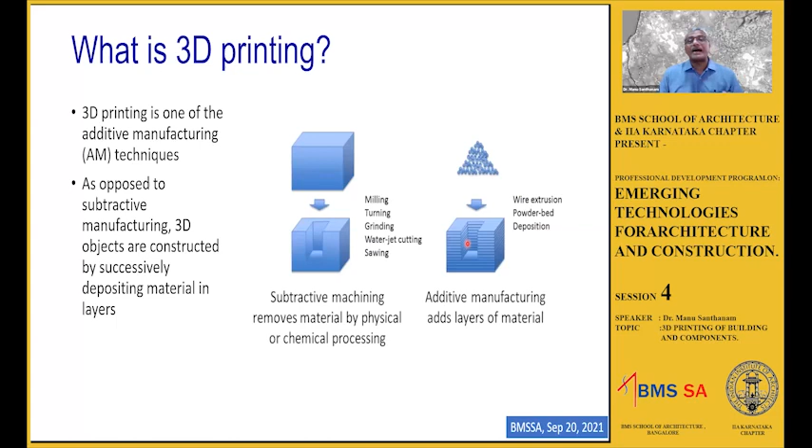Now, in construction, additive manufacturing can be of different types. 3D printing in construction can be accomplished in two ways. One is extrusion-based 3D printing, where the idea is basically extruding the material out of a nozzle - almost like pushing something through a die that comes out with a desired shape - and then printing layer upon layer to build up the structure. That's called extrusion-based 3D printing.

The other option is binder jetting. Here, you have a bed of powder and you spray ink on the bed only in the locations where you want the ink to solidify the powder. For instance, you may have a bed of sand and spray some type of polymer on top of it in a certain pattern. The polymer interacts with the sand and encapsulates it, causing it to harden only in specific locations. This is done over a number of layers so you can build up the entire structure. That's called additive manufacturing by binder jetting.

But for the most part, construction 3D printing seems to follow the approach of extrusion-based printing, because that's where the maximum size and scale can be realized. So you see here a typical frame-based printer - that's the frame, and the gantry on top of it can move along this frame, and there's a vertical component that can move along the gantry.

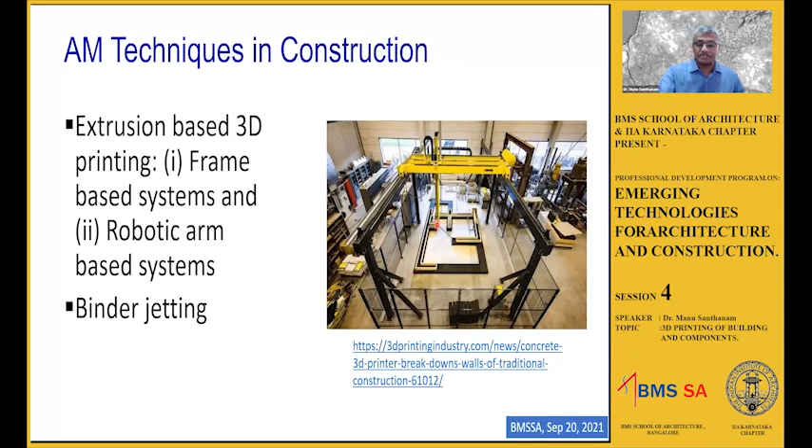Now, why is it useful in construction? We know very well that a lot of time in construction, I'm sorry, I don't know why this is going on its own. So a lot of time in construction is spent in actually,

Okay, there's some setting I need to change, just 1 minute. Just give me a minute, I'll just change this and come back. Just give me a second. For some reason, the slide is changing automatically. Sure, sir, no problem. Okay, let me try again. Hopefully it won't change on its own.

So I was talking about the fact that construction 3D printing can be advantageous in a way that we can save on the cost of formwork. And not just the cost of formwork, you can also save on the time. A substantial amount of time in construction is related to setting up the formwork and then disassembling it after the construction is done. So if you can work in a system without any formwork, you can save considerable amounts of time in the construction project.

And of course, the formwork material itself is expensive, and you may have to spend a lot of money trying to create formwork for shapes that are otherwise not really possible. For instance, if you have a lot of curves in your building, such things with formwork can be quite difficult to execute. In such cases, the geometric flexibility that you get from 3D printing can really be a major

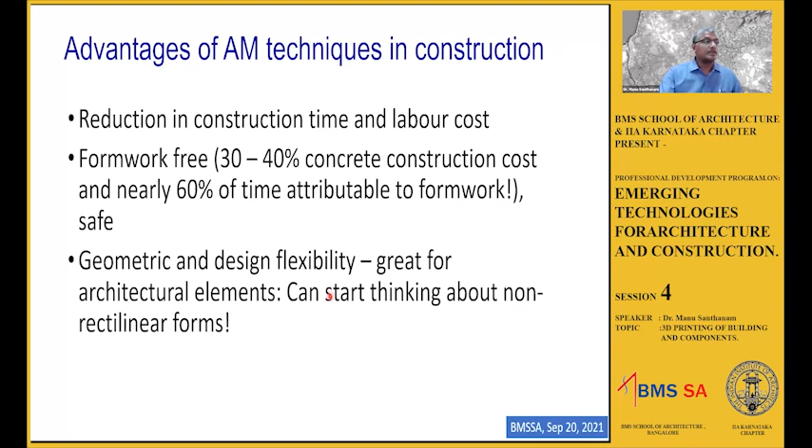Now, there are several manufacturers of 3D printing equipment across the world, and you can see that examples of 3D printing are abounding all over the world. Typical examples shown here are from the US and from Europe, in Italy. This is actually a nice robotic arm-based printer. So you have a robot which can deposit concrete anywhere it wants.

This is the printer that we actually have at IIT Madras. It's a frame-based simple printer, which has been manufactured by a company called Tvasta. Tvasta is a startup set up by some of our students who graduated from here in 2016. They went into entrepreneurship and set up their own venture, and they've been working with us in 3D printing ever since.

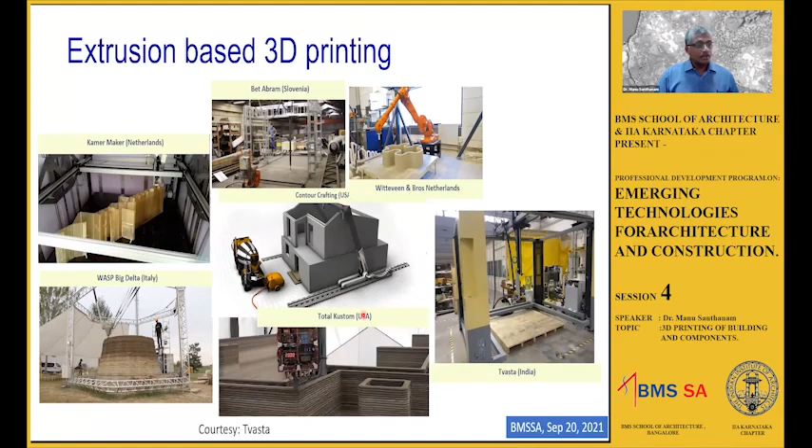Okay, that again depends on the structural requirements that you have for your structure. So this is a simple way of translating 3D printing into an off-site technology. Off-site implying the printing is done in the factory and the printed components are brought to the site to do the manufacturing. Now, you may ask me a question, why is this different from precast?

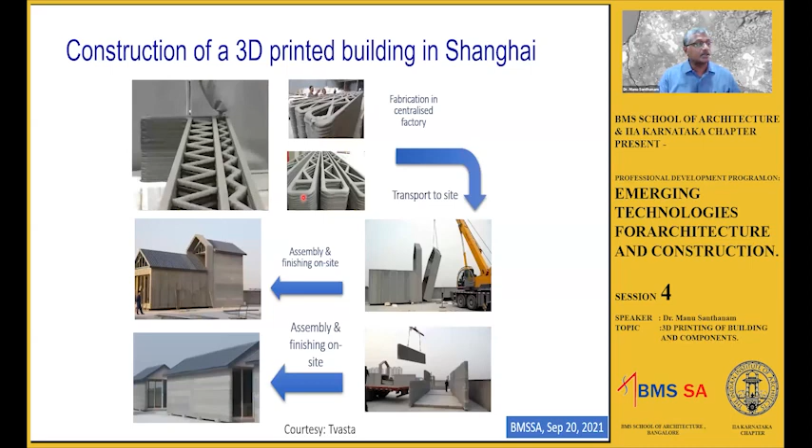So that means you need to spend sufficient amount of time trying to fix up the right type of your mix. The concrete mix has to be very special in this case. So that is made sure by using appropriate types of additives. Okay. So of course, my focus is not here to get into the material part. I want to explore how 3D printing can actually give some sort of benefit for making mass housing.

Now, mass housing, you may think we are referring to primarily multi-storied structures that are rapidly put up. But sometimes we also can refer to mass housing in terms of a multiple number of units spread across a very large area. For instance, for rural housing, where land is not really that big a problem. People want their own house for independent living and so on. People are not really that keen about the idea of sharing a building with other tenants like most of us in the urban environments are used to.

Secondly, when you do individual houses, you can customize each house separately. When you're doing conventional construction with formwork and with brick and mortar, you are restricted to very specific shapes. Okay, and if you really have to make the maximum out of these units, you have to replicate as many of the units as possible. In 3D printing, you don't really need to do that. Okay, now you can actually mass customize houses even in mass housing.

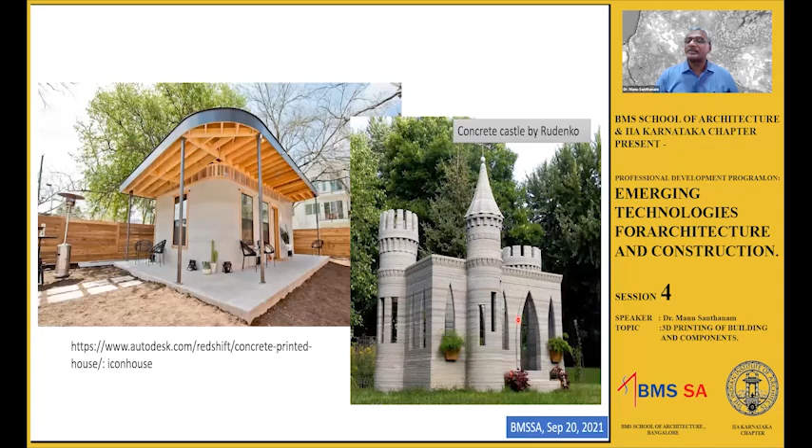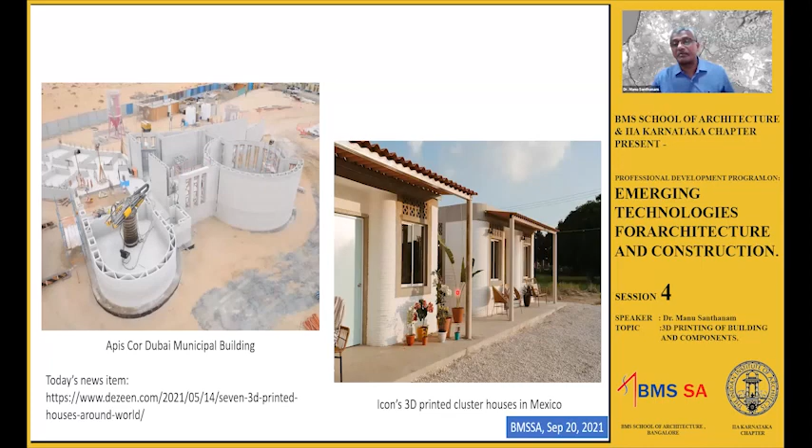These are clusters of houses that have been built in Mexico by the company Icon. So again, that's where when land is not a problem, customized units can be built, and that's where you can really maximize the benefit from 3D printing.

Again, of course, you can also go for architectural elements, like if you look at the shape of the concrete that has been printed here, could not have been possible with conventional concrete at all, right? You can see interesting furniture elements, okay? And there's a bus shelter that was printed by WinSun Global also.

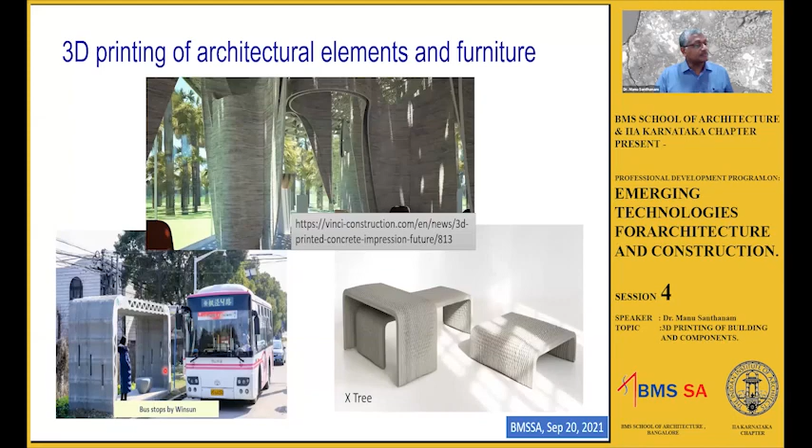Some more examples of structures. So these are army barracks built by the US Army Corps of Engineers in North America, where they wanted to actually utilize 3D printing as a technology to print barracks for their soldiers in locations where conventional construction could not be done. So that's another major advantage.

If you have good transportation infrastructure, you can actually put the printer along with the material at the back of a truck and ship it to wherever you want to do the construction, without really having to set up other supply chain for conventional construction projects in such locations.

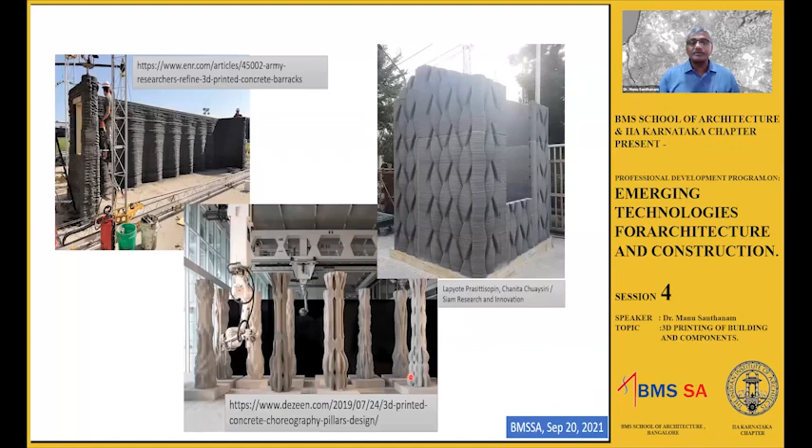This is an interesting example of a very architecturally pleasing 3D printed structure. You can see the kind of designs. It almost looks like a woven straw type texture, which is obtained by 3D printing of concrete, basically. Again, very special concrete columns, which have been 3D printed. You can try and obtain very unique textures with the help of 3D printing.

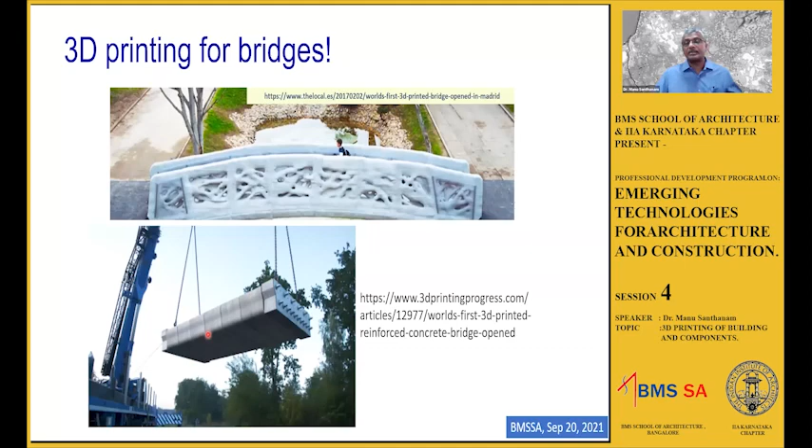Now, of course, you can also go for more infrastructure related applications. So here, this is actually a pedestrian bridge that was 3D printed. This is a post-tension girder. You can see that there are several segments which have been printed separately, right? And these segments have cavities in them that are then post-tensioned with the post-tensioning steel.

Right, so now, why is 3D printing something which is interesting from the point of view of housing applications? Of course, you all know very well that India needs a lot of housing. We are expecting close to a 1 billion population in our urban areas by 2050. And our housing needs are going to be around 100 million houses by 2030. That's a large number of houses.

So many of you may have heard about the government's initiative. They've come up with this Global Housing Technology Challenge, which brings in global players in housing with the latest technologies that can rapidly produce multiple dwelling units. Now, of course, those are technologies that are already commercially available and can be immediately implemented on site. But 3D printing is not something that was identified for this kind of a work.

But the government did identify 3D printing as a potential future technology for use in constructing houses. And as a result of that, they are also likely to give some funding to set up an accelerator at IIT Madras to help businesses that can promote 3D printing as an application for housing. So that is something that we are currently working on.

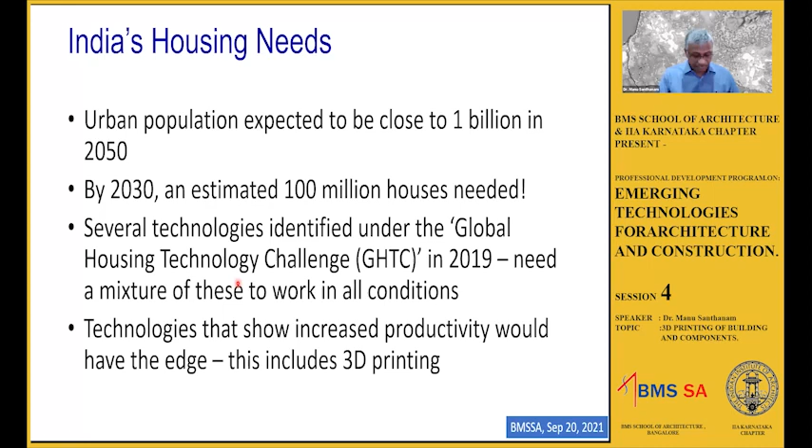So why do we want to print houses when we can use other available techniques? As I said, the unique selling point, or USP, of 3D printing is individual customization. You cannot do that with precast or other such technologies. The other thing is, you might have seen in the previous examples I showed you of 3D printing, the walls are all printed with cavities. So concrete is not completely filled up in the wall, right?

So you can make the forms structurally efficient. You're no longer bound by the rules of constructability, right? A typical beam or a column does not have to be that particular rectangular shape, because you're not now obliged to fill up the entire cross section with concrete. You can deposit concrete or put material only in those locations where it is required. So you can do some structural optimization and save on the material costs. And of course, in terms of sustainability also, using less material is always better.

The other thing is, because of the cavities that you have, you can do weatherproofing of your structure. Weatherproofing is very important because you can regulate the sound and heat transmission of such walls and ensure that you have a very good livable environment inside the structure. And again, as I said, portability of the equipment and material is quite useful, because you can now send it across to different locations to execute construction projects when you don't have a regular supply chain established with conventional construction.

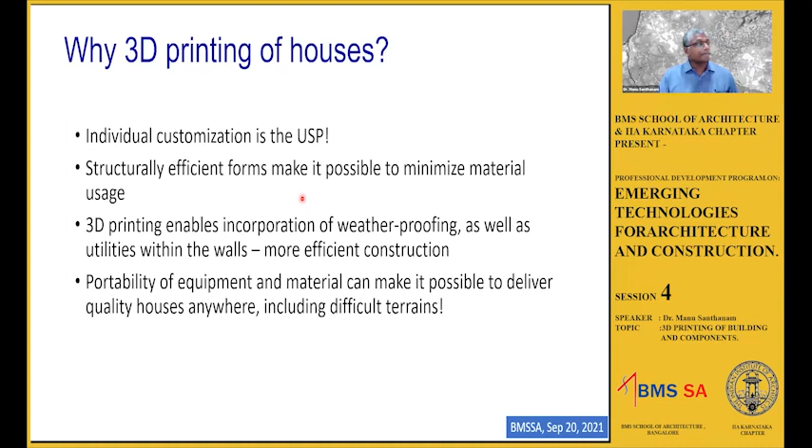Now, the issue is, are we ready now at this stage for deployment? The answer is, of course, no. We are currently focusing on pilot projects because we still need a lot of things to be done before we can demonstrate the real viability of this application. One aspect that is still bothering is, how do we actually put in reinforcement? When you go for multi-storied buildings, reinforcement placement is very critical.

You need to get good level of resistance to structural loads as well as other dynamic loads, which are wind or earthquake based loads. How can we start designing concrete structures which are 3D printed to accommodate the kind of reinforcement or the amount of reinforcement that is necessary to actually provide such levels of structural capabilities?

The other thing is, can we automate the finishing process? Now, you may have seen in the examples that I showed you earlier that the layers can be visible from the outside. Now, while many architects seem to like that, there are several house owners who may want to actually see a typical flat-looking surface that can be painted on. So, can we automate the finishing process? Answer is yes, of course. You can do that while the printing is actually happening, and many people have attempted putting finishing tools right along with the printer to really get the kind of finish that we want.

Printing of roofs, foundations, and other horizontal elements can often be a challenge, because very often printing works very well for vertical elements like walls or columns, right, where you continuously move upwards. If you have to spread a large way in the horizontal direction, it is not really advantageous to do 3D printing. For instance, you want to print a slab that is 250 mm thick. There is no point in doing that. You would rather print the periphery and fill up the interior with regular concrete. Okay, so that's basically the challenge. How do we actually design these horizontal components efficiently with 3D printing systems?

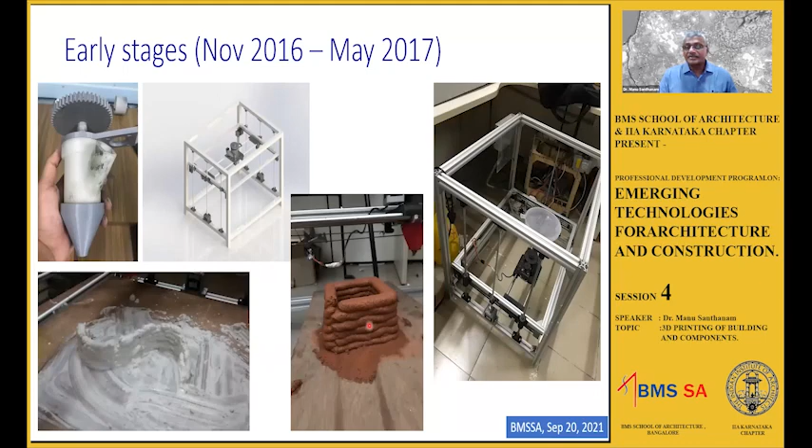So this is the frame. And this movable head basically can move in one direction along the frame. The frame itself can move in this direction. And you can see the nozzle, one of the early designs of the nozzle, which was used to print simple materials like lime mortar. This here is lime mortar. This is basically clay. Okay, clay was used to print also. Later, we started printing concrete after we were able to design concrete well enough. Of course, I'm not going to get into the specifics of the materials because it's going to be a little too much for this lecture.

But as far as the material is concerned, please remember, I told you that we need to print while the concrete is still fresh. We don't wait for the layer to get hardened. As a result of which, when I print this layer on top of this layer, the weight of this layer and the subsequent layers can press on the bottom layer. When the weight presses on the bottom layer, if the concrete is not properly designed, it will start flowing outwards and it will start getting compressed. And that's not what we want. We want the layers to maintain their shape and size.

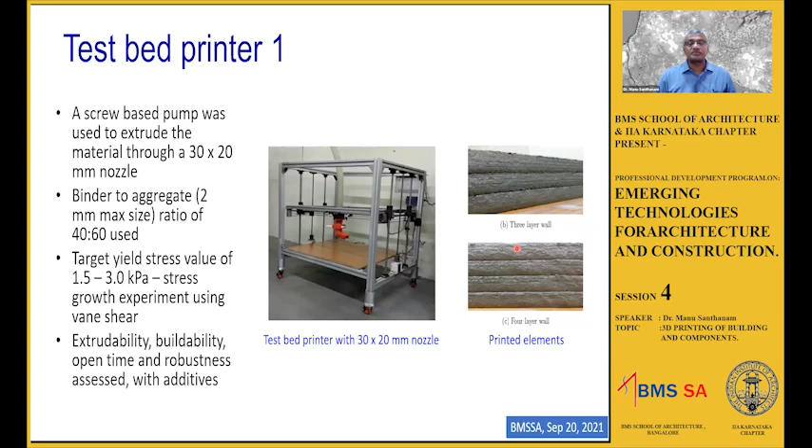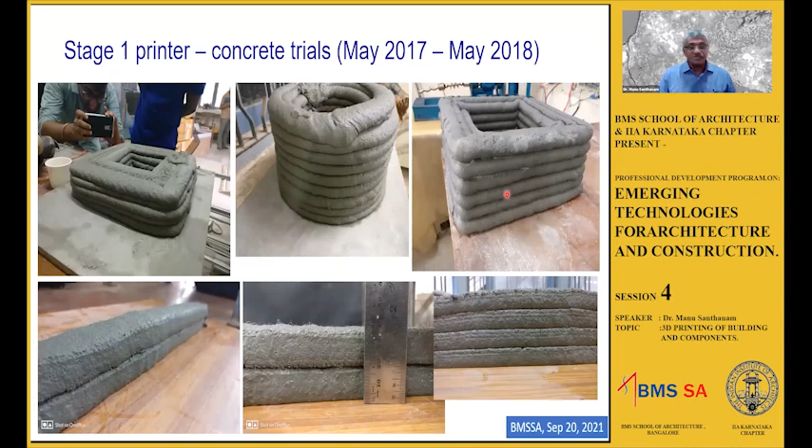And that's exactly what you see here in the 3-layer wall and the 4-layer wall, that the shape is perfectly maintained. You don't have any excess compression of the layers, which makes the material uniform and good for the application of 3D printing. Some more elements that are being printed here. There's a cylindrical element, that's a square element that is printed in 3D printing. Okay. These were just some early trials that we did.

The next stage was to start evaluating the material characteristics. Now, typically you may have seen in construction projects, if somebody wants to evaluate the concrete that has been supplied, you'll be making cubes with that concrete and testing the cubes for their compressive strength. If you have a brick, you'll be judging the compressive strength of the brick as well as the water absorption. Now, what kind of test do you need to do for 3D printed concrete? It's not that easy to understand because you can't make a typical cube or a cylinder with this kind of a material, right? You can possibly make an element like a wall, right?

4 layers are there and these 4 layers are compressed together. And this is the kind of failure that you get in the compression, okay? Now, but how do you determine the size of the layers? How many layers should be there? And what should be the height of the layer? What should be the thickness of the layer? All that can be highly variable, because of which we still don't know what would be the right scheme of characterization of the properties of 3D printable concrete.

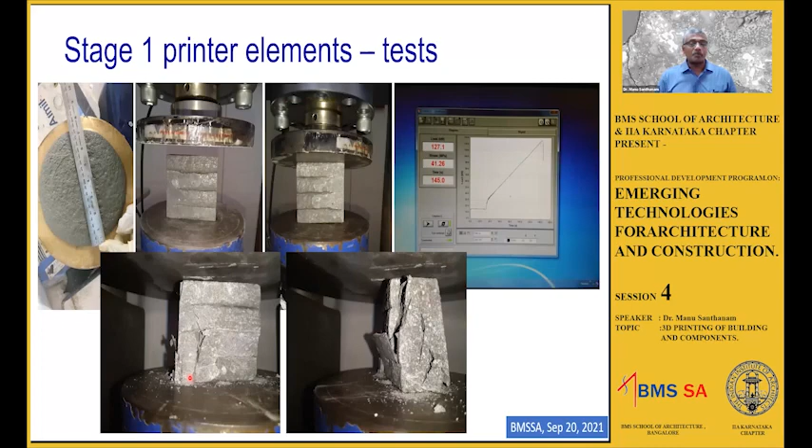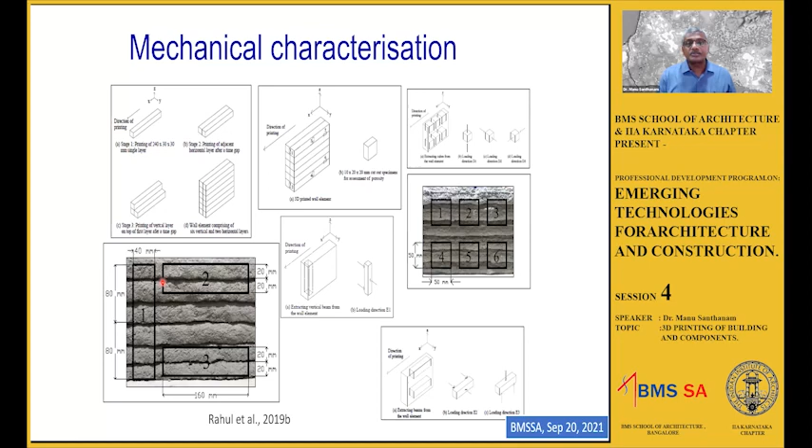We also did additional investigations to understand whether this concrete behaves the same when loaded in one direction versus another. There's a lot of material we worked on in deciding the best configuration for printing and the best means of extracting samples to assess mechanical properties. Unless you understand the load carrying ability of the concrete, how will you use this to design a wall or column? So we can get the true capacity of the concrete itself, taking into account the effects of the layers. Otherwise it won't show the true strength of the concrete.

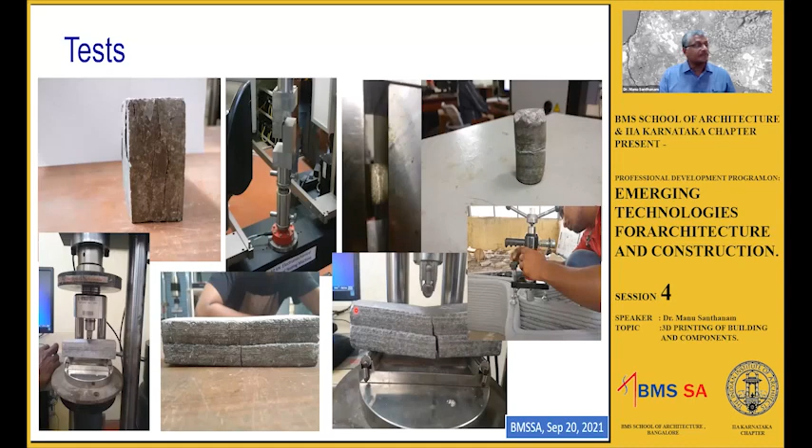Some more tests are shown here. We also did bending tests for the two layers printed together, and several other tests, which I won't discuss in detail. These are just some additional elements that were printed just for the sake of printing.

Then from this smaller scale printer, we moved on to a larger laboratory level R&D printer. In this case we wanted to print elements that were wider and longer, and could be printed up to about 50 centimeters in height. The idea was to print modules for a simple room type structure.

This is a test bed, and that's the printer frame. The material is fed into this primer, which pushes the concrete into the pump. While the pump retracts, it takes in all the concrete, then in one forward movement of the piston it pumps out all the concrete, carried through this pipe and delivered to the nozzle. In one forward movement of the piston, we push out about 60 kilograms of material.

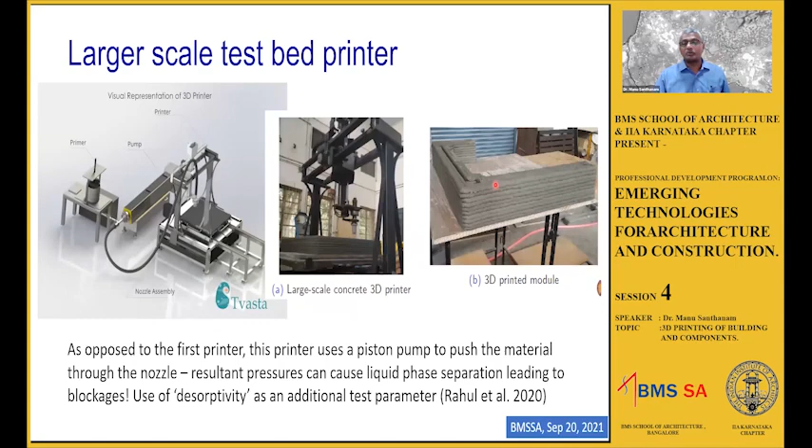With that 60 kilograms of material, we were able to make a module like this, a 3D printed module with a cavity inside. It's got peripheral walls and a corner cavity where reinforcement could possibly be placed later. This shows a close-up of the pump that was used - the material getting pushed out is coming out quite uniformly. This is a simple square structure that was printed using this arrangement.

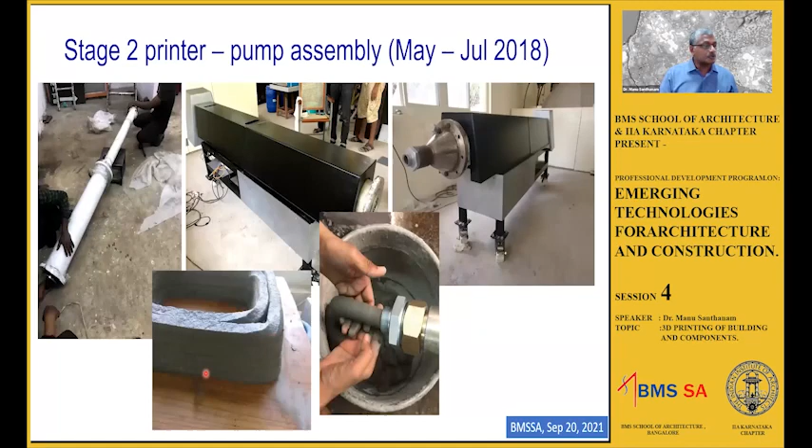With this nozzle and printer, these modules were actually printed. You can see these modules getting printed - the height of each print was approximately 30 centimeters. The idea was to assemble multiple modules on top of each other to create a room type structure.

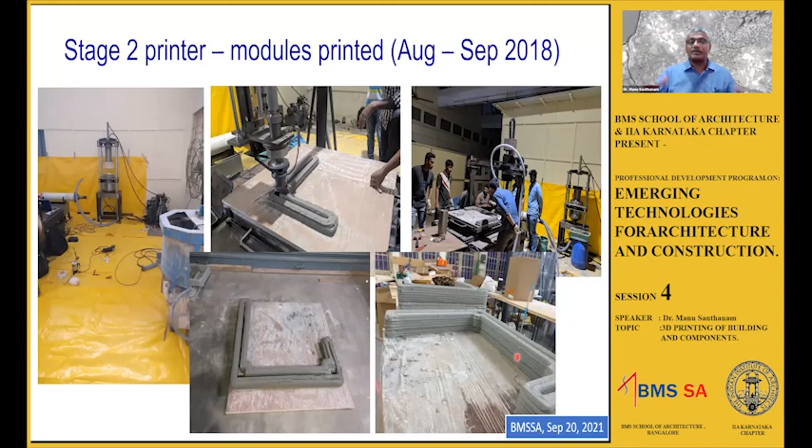And that's what we did - we assembled these modules together. You can see this one half module, and that's the other half module. Several of these two half modules were kept one on top of the other and jointed using mortar - you can see the joint here, used to build up this entire structure.

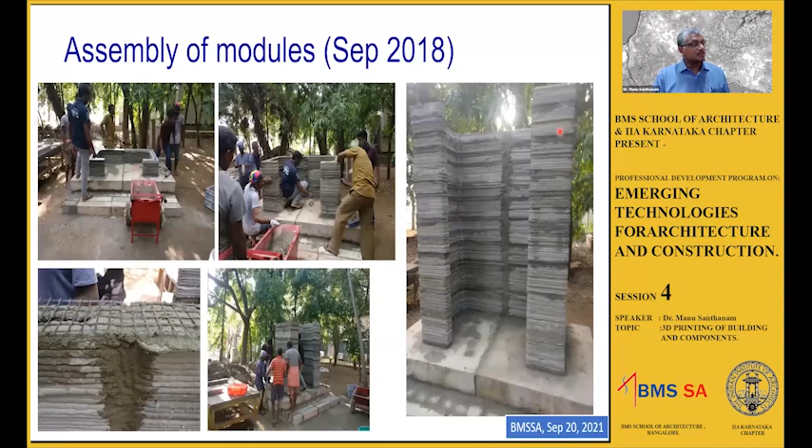This simple structure was then inaugurated by the Ministry of Housing and Urban Affairs, with whom we also conducted a workshop a little later - a national workshop on 3D printing and construction in November 2018.

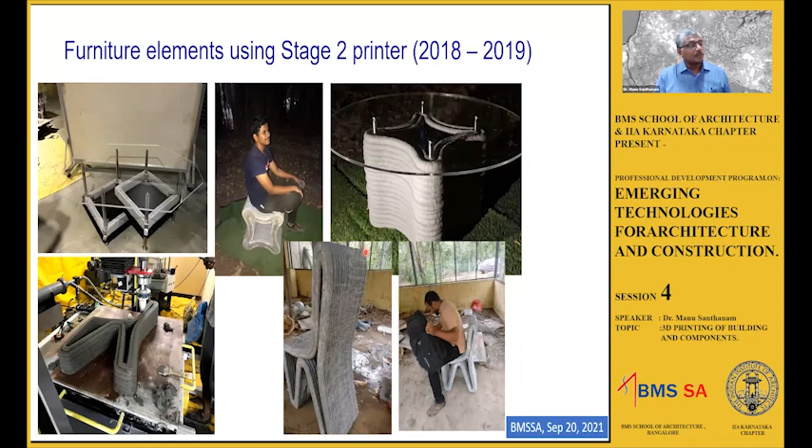You don't have to print right on top of the previous layer - you can offset the placement of the next layer so there's an overhang, creating very interesting intricacies which you cannot typically do if printing layer upon layer. With facades and Jali type printing, you can also get very interesting shapes printed out of these 3D printed materials.

Now you may be wondering why all of them look to have the same thickness of filament. That is dependent on the nozzle you have - you can control the shape and size of the filament by the size of the nozzle itself.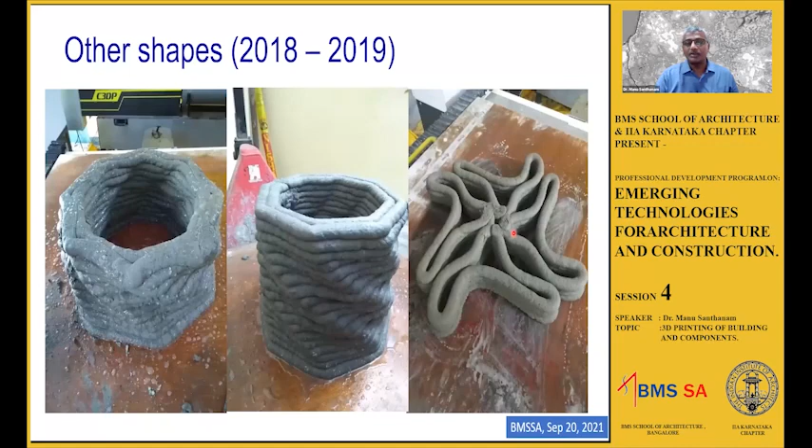Many of you are familiar with the muruk that we typically make at home. A muruk is basically the same technology. You make the dough, put it in the die, and press it out of the extruder. The extruder gives the shape to the muruk. That's exactly the same technology as 3D printing, to put it in simple terms.

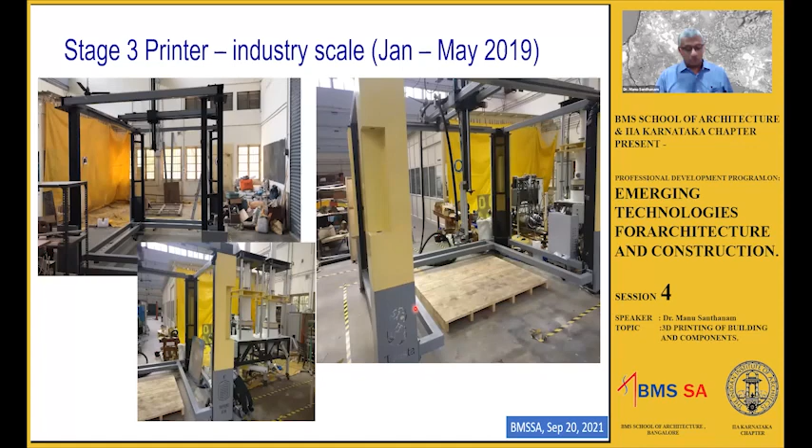This same printer was used to print this kind of toilet. This was a project partially funded by Larsen & Toubro, L&T. Their mandate was that we should print everything, including horizontal components like the base slab.

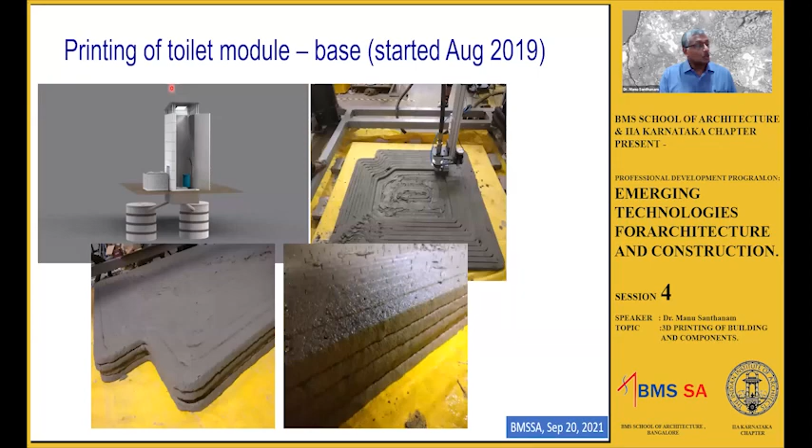So this base slab was also printed completely. You can see the printed concrete here, printing the base slab. Then the walls were printed in two halves, lower half and upper half with the roof. The lower half was printed along with the base slab. You can see the lower half with the base slab at the bottom, and the kind of wall that is there - only two perimeter walls with the inside completely empty.

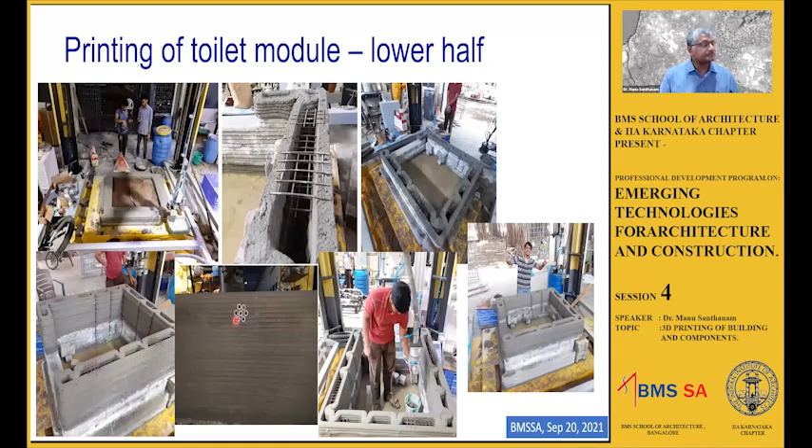To ensure these perimeter walls could support their own weight and not collapse outwards, we placed steel meshes to ensure they were integrally linked to each other. Then we could build an entire structure like this - you can see the wall coming up. We also left some plumbing pipes to ensure we could replace these with larger plumbing whenever desired. So this is the lower half completed.

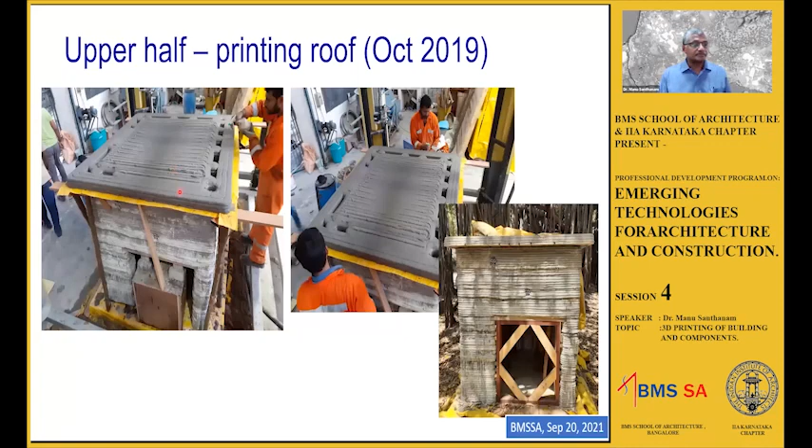Similarly, we printed the upper half in several layers, and the roof also was printed. The roof was printed by giving formwork support from underneath - you can see the formwork underneath inside the roof, supported on top, and then the roof was printed right on top. So this is the upper half that is printed.

For the next stage, for the construction of the house, they took this to a new level and set up this entire printer in a factory-like setting where the printer was put on rails. You can see these rails here. The rails enable the printer to move along one direction for as long as you want, so the entire printer can be moved to print first on this bed, move a little, start printing on the next bed, and move further to print on another.

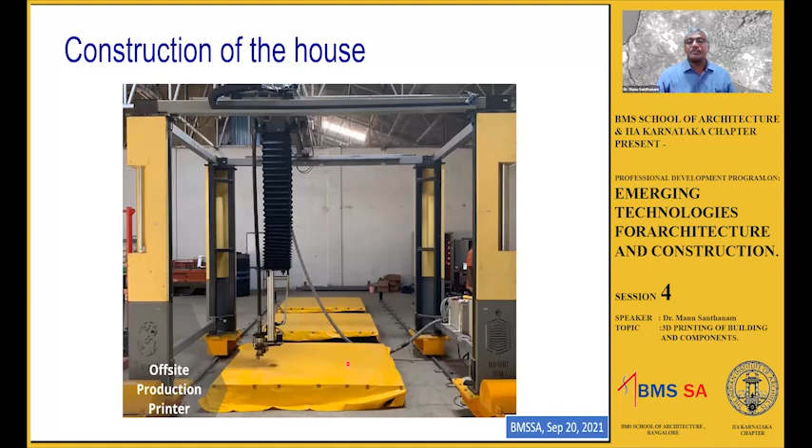The advantage is that in continuous operation you can print multiple elements. You don't have to wait for the element printed on one bed to harden before being able to take it out. You can print continuously on several beds, giving infinite access along one direction. That's what was done in this case.

You can see multiple elements being printed - two elements on one bed, two more on the next bed, and one more on the third bed, and so on. Several elements are continuously printed, then stacked nearby and cured by spraying water or putting a curing compound until they get sufficiently hard.

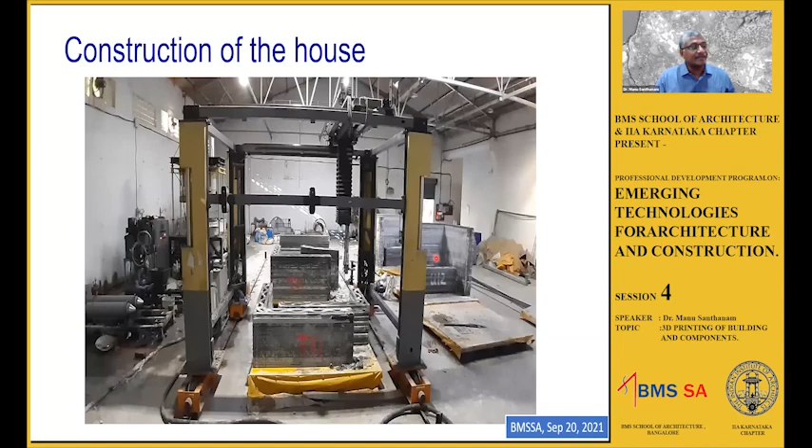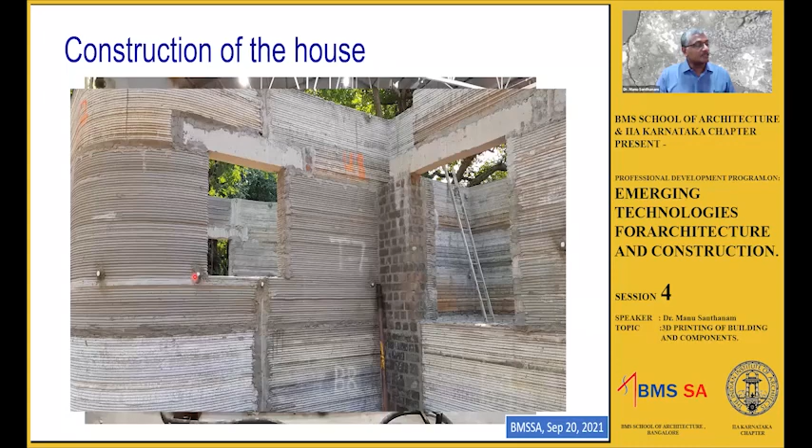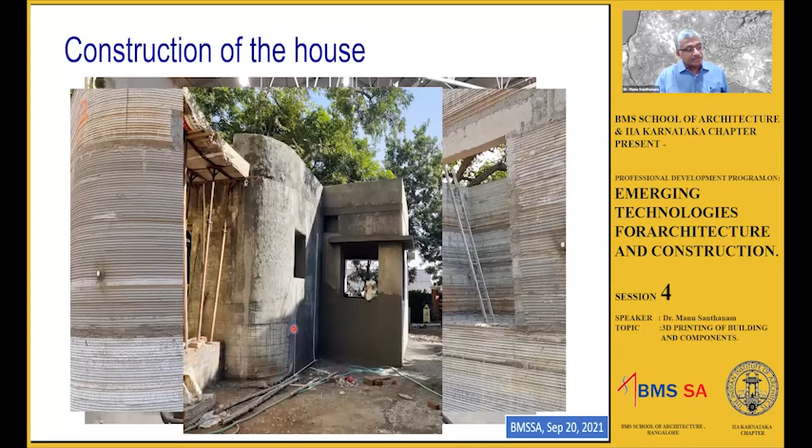These stubs are put for plastering the top surface because people should see a typical building. So we plastered the top surface, and we kept some components unplastered just to show the kind of texture you can expect in the wall. So this is the finished building.

You can see this is a patch where we left it unplastered to show the wall texture. Similarly, when you go inside this building, you can see a video of construction of this building on YouTube. If you search for India's first 3D printed house, you can get the video, and it will show you the inside also.

There are several locations where plastering is not done to show the kind of texture that you can expect from 3D printing. So this is the house that we have constructed on campus in IIT Madras.

Tvasta is the main company involved behind the construction, and they are currently executing a project of a school outside of Chennai, where they have a very vast area of land and are constructing a ground+1 structure for a school. There are obviously challenges they will have to meet to really get that construction project going, because when you're going for ground+1, obviously there's a lot more you need to show with respect to structural design.

This is a simple single-story house, only 600 square foot, so structural design is not all that critical. But for a school, obviously you need very strict quality checks and construction structural checks to ensure the safety of the students.

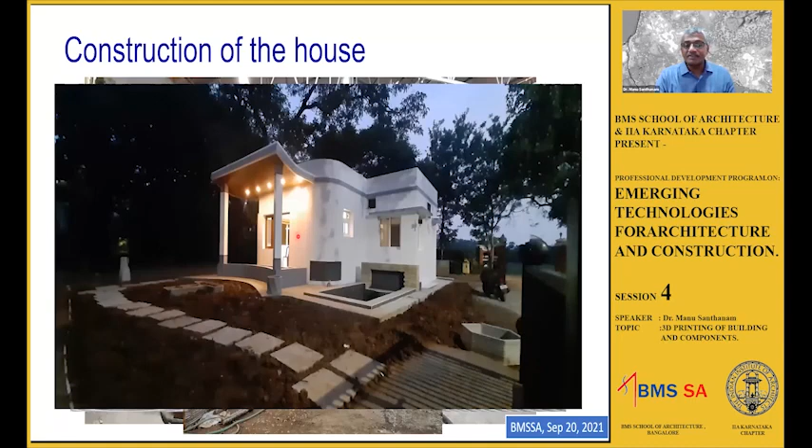So just to summarize the journey of Tvasta and IIT Madras, in 4 years we have done work almost equal to about 50% of major 3D printing research groups across the world. We have also executed all our projects. The entire research funding used for this set of projects is about one-fifth of what typical groups outside the country have been using.

But the main issue is whether we can scale it up further. That depends a lot on what kind of support we get from the industry to really take this forward.

So now, what is the strategy to take this forward? I showed you some benefits that can be obtained from off-site printing - that means you print in a factory and then take it to site and assemble it. But the idea is the best execution of this could be possible if we can work in the form of, let's say...

You typically see these books from which you can actually select specific designs, right? The client can make a choice of the layout and architectural sensibilities that need to go into the construction. The 3D model constructed based on the vision of the client's needs by the architect should then be broken down into standardized modules.

Now, when you standardize the modules - for example a straight wall or a curved wall - you can produce them in the factory in massive numbers and supply these to the sites quite quickly. That's where the strategy should be.

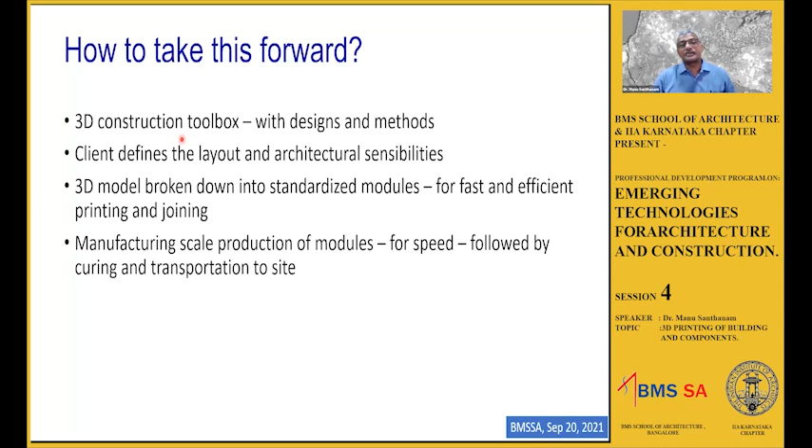Typical houses take a few months to construct, 3 to 6 months at the minimum. If you can cut that down to a week, once the supply chain is established, then that can really be a massive groundbreaker as far as your construction methodologies are concerned.

So from industry R&D, to scale up the R&D with support from the industrial alumni, we can actually start building up several structures in a very quick fashion. For instance, those toilet modules that we showed you can be built up in a time period of just 6 to 10 hours. So we're talking about less than a day for the entire structure to be set up. Of course, it will take time for it to gain strength and get hardened and all that. But the time of construction itself is going to be very small.

Single-story houses can be constructed in less than 5 days. If you have the components ready, and you can print the components rather quickly, then assemble them on the site, by the time you're done with the finishing, the concrete would have gained sufficient strength and you will be ready for occupation of the house. Multi-storied G+3 can also be constructed in a very quick time period. The only problem there obviously is the extensive regulatory approvals that we need to achieve before we can really start utilizing this technology.

Okay, so what I expect is, given the current pace, the mass application readiness should be achieved in another 2 years. But of course, that needs a lot of financial backing. We are hoping that a lot of industrial support will come with some time, and we'll be able to push this to the next level by appropriately scaling up.

So again, the first 3D printed house that we did was a culmination of 3 to 4 years of research efforts. And one interesting thing here is that the entire technology is Indian. The company involved in the construction was Indian. They made their own 3D printer. They didn't purchase a 3D printer from anywhere. So it was a completely Indian-made technology.